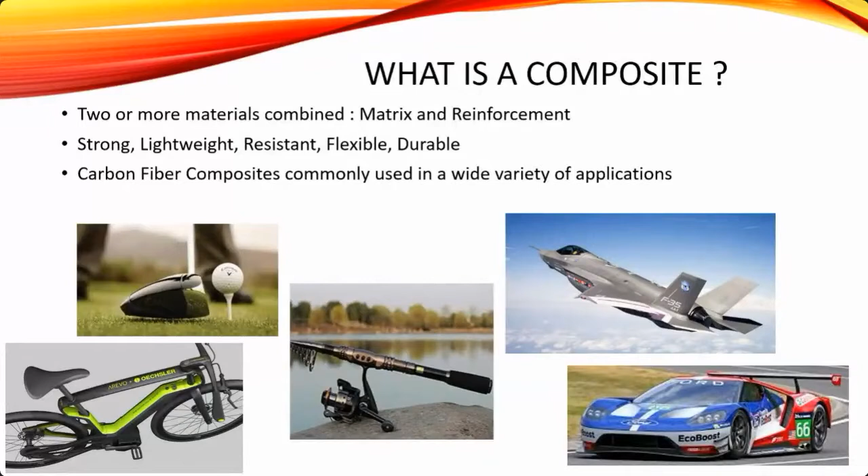Carbon fiber is popular because it's very strong and extremely lightweight. These properties make it a great choice for golf clubs, fishing rods, and bicycles. Carbon fiber helps to optimize the performance of race cars and even airplanes. We've seen some benefits of composite materials. Now let's see how we can utilize 3D printing to create strong, lightweight, and long-lasting parts.

Markforged specializes in the fused filament fabrication process, also known as FDM. A base filament of thermoplastic material is fed into a heated printer extruder head and is deposited onto a platform, one layer at a time. The build platform then lowers as each layer continues to grow the part. A unique option that Markforged offers is continuous fiber reinforcement. Maybe your part would benefit from additional strength or stiffness. A second filament can be extruded at strategic locations to increase the strength of a part.

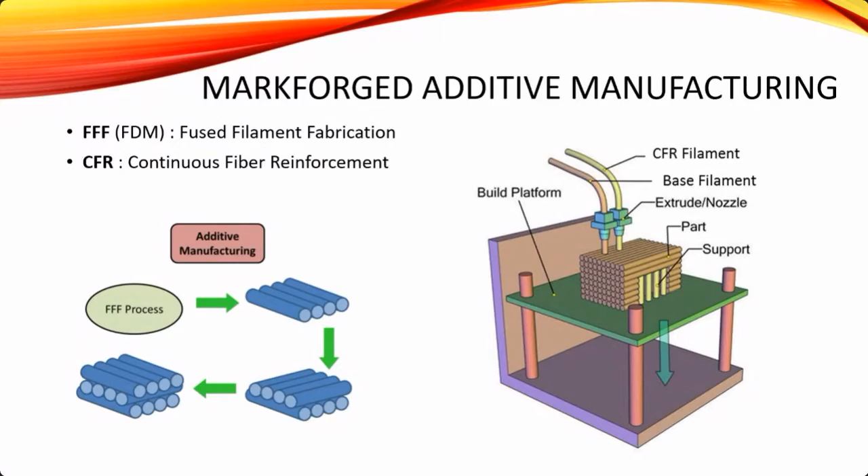To further illustrate this process, here's a photo of a 3D printer. The filaments are stored on reels and are loaded in the printer. An entire part can be printed using only the base filament, but you can also choose to strengthen your part using continuous fiber reinforcement. The next photo illustrates continuous reinforcing fibers along the outside of the part. This will maximize the bending strength. Next, we'll review which materials are available for base filaments and their individual benefits, and then we'll look at various options for continuous fiber reinforcement.

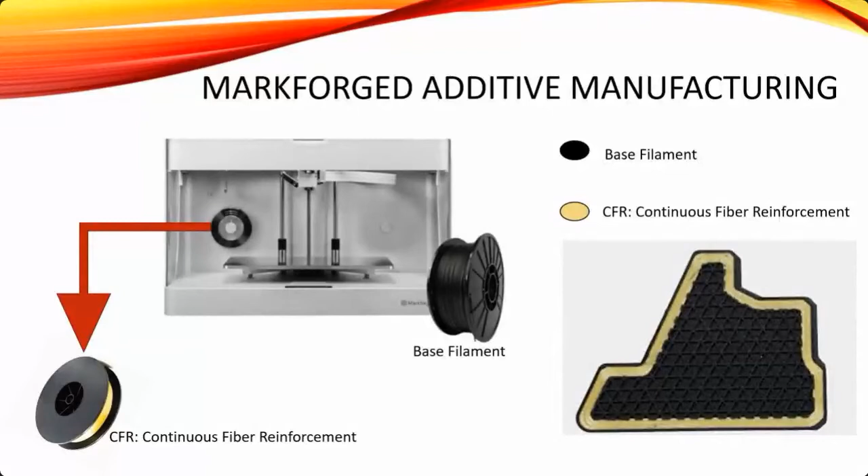Onyx is the flagship base material, and it's also a composite. To best describe the strength of this unique material, it's helpful to use an analogy of another very common composite we see every day. Concrete is made up of cement, sand, and aggregate. Each individual component will not hold its own shape with any amount of force, but when combined, they make a rigid, solid material. Onyx is created by combining a nylon thermoplastic with chopped carbon fibers.

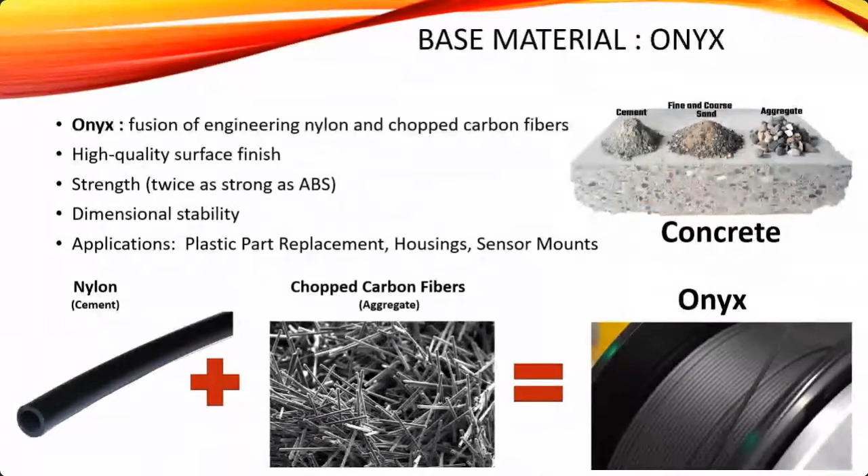We know that carbon fiber has very strong attributes. Another benefit of this creative blend is an impressive, high-quality surface finish. Parts are both beautiful and strong. Also, Onyx holds its shape. The edges are true, parts look better, and fit together better. Onyx is an excellent choice for so many applications. Functional, with a surface finish you can be proud of.

Another, I have to just click. All right, let me just, I don't know what happened there. I'll restart this slide.

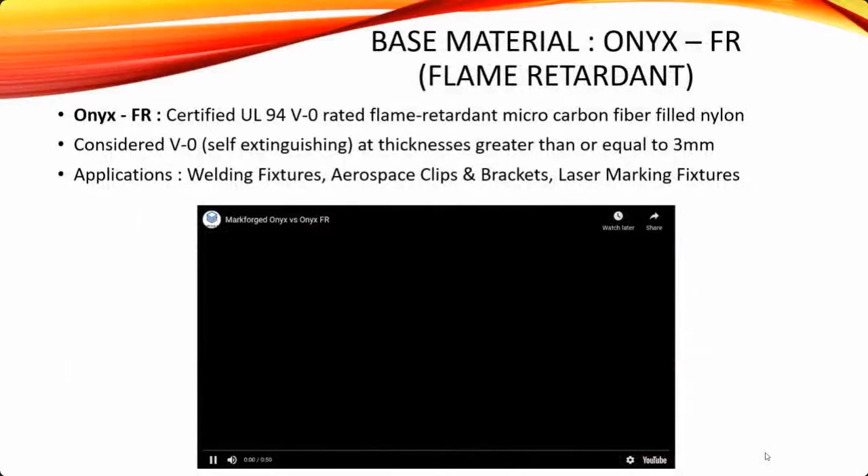There we go. So what if you require parts to be non-flammable? Markforged developed a very special variant of Onyx, which is flame retardant. You'll still have all the benefits of Onyx, strength, a beautiful surface finish, and it can survive in a flammable environment. Onyx FR is a great material choice for automotive, aerospace, and defense applications. The video does a great job of demonstrating how amazing this material is. Even under a constant flame, the fire does not spread. It's self-extinguishing.

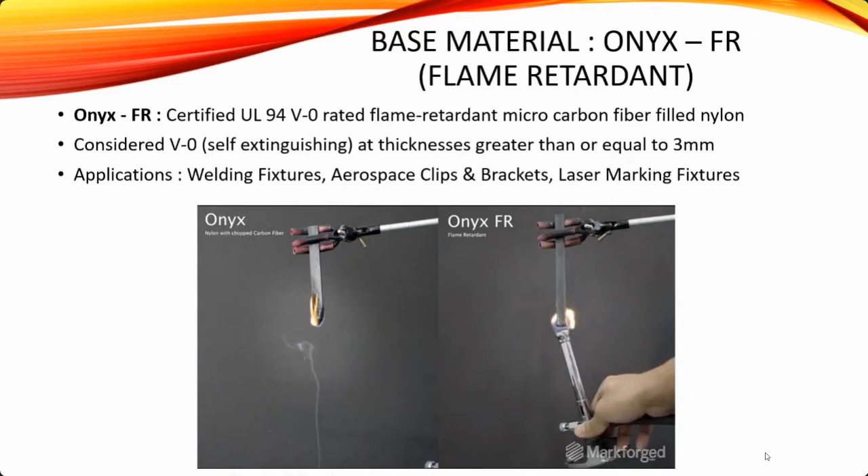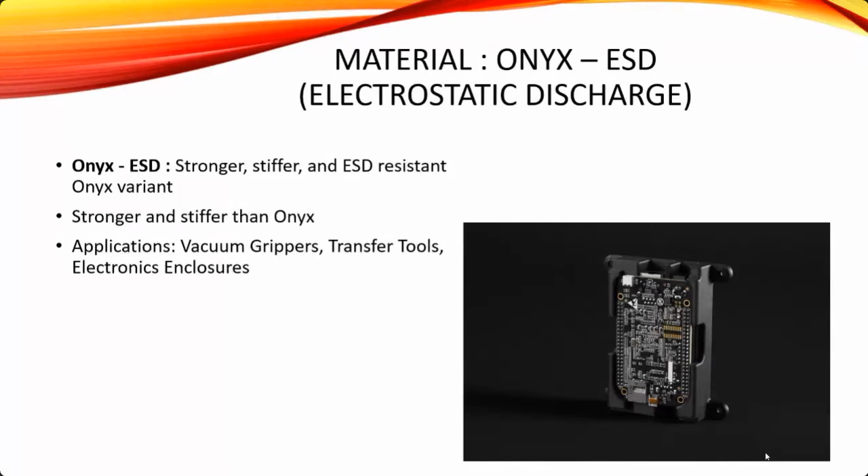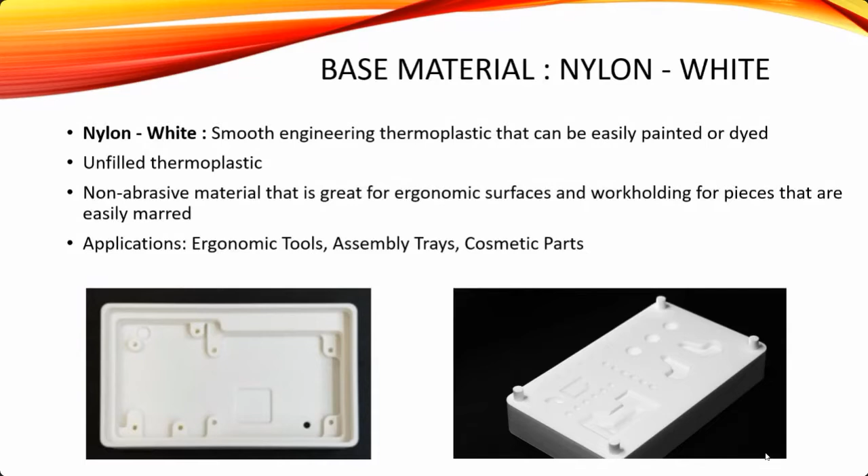We'll review the additional filament choices available for continuous fiber reinforcement. Being able to pair the optimal base filament with the optimal continuous fiber reinforcement allows us to utilize all the benefits of composite materials.

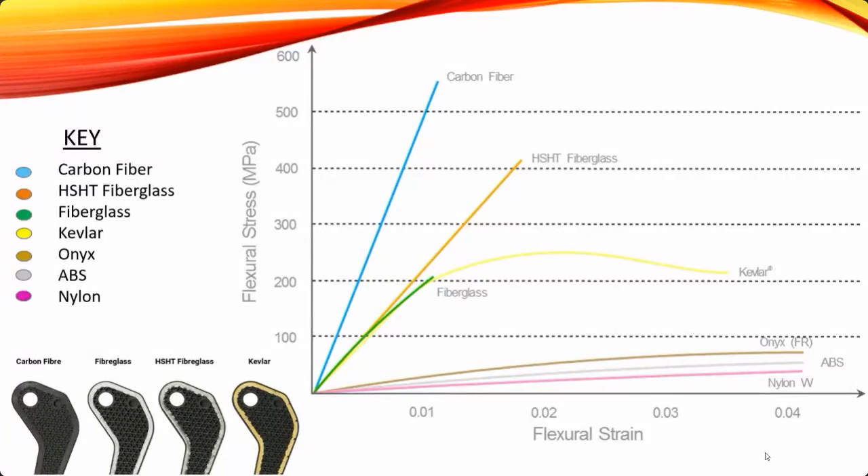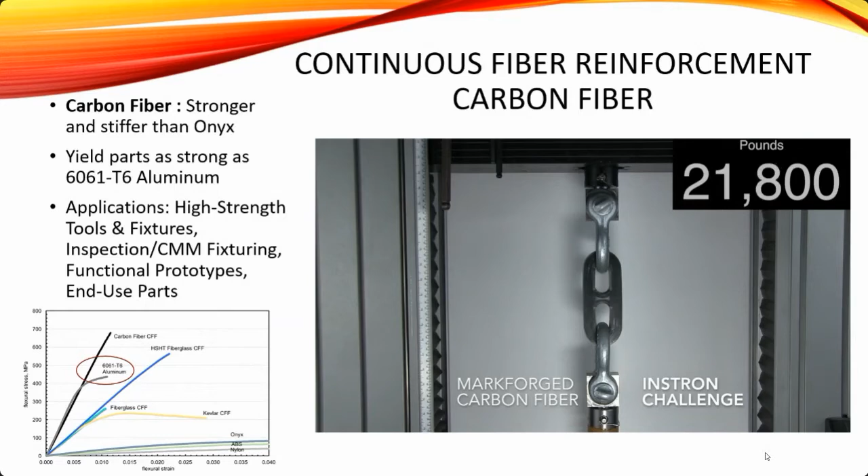This Instron challenge really showcases the strength of the continuous carbon fiber. We'll see the pounds here, right there in the upper right. Still holding it, 21,000. Still increasing. Wow, I just think that's a great example.

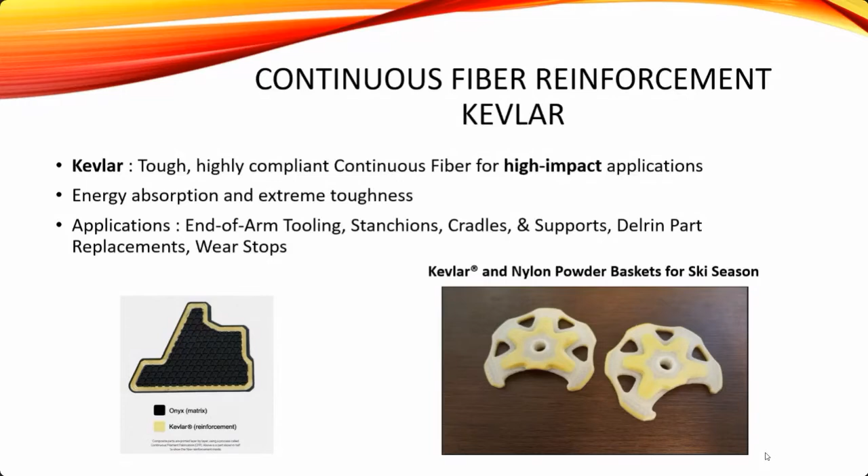Kevlar is a great option if you need a forgiving and durable material. Kevlar is commonly used in bulletproof vests. The goal is to absorb a force and not break at high impact. It's easy to recognize its yellow gold color. Using nylon as a base and Kevlar as reinforcement results in flexible yet very strong parts.

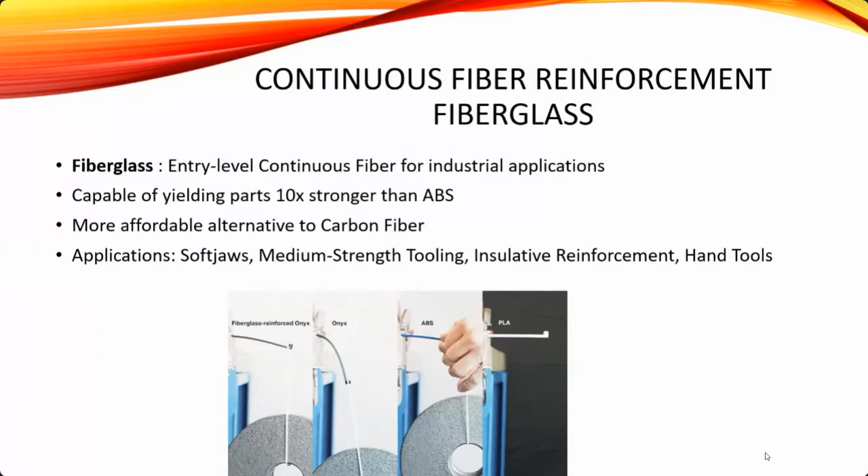Last, but certainly not least, is high strength, high temperature fiberglass. This reinforcement fiber comes in second in strength, just after carbon fiber. It's strong in both low and high temperatures, but it's ideal for use in high temperature environments like autoclaves and molds. A great combination would be using Onyx flame retardant with high strength, high temperature fiberglass for a welding fixture, for example.

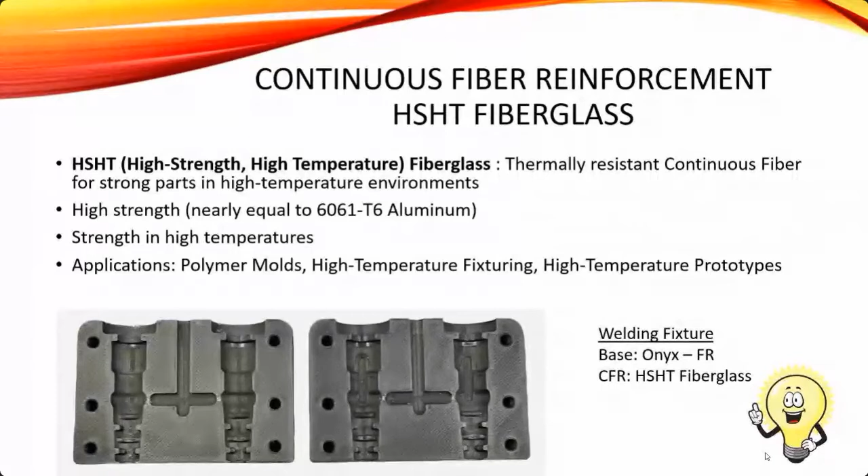All right, and as promised, here is today's lineup of the Markforged composite 3D printers. We have two series, the desktop series and the industrial series. How do you choose a model? Well, you want to start by identifying your needs. What size are your parts? Are there any strength requirements? Do you have any high temperature or ESD requirements? Do you want the ability to customize many different designs for new projects? I'll give you a brief overview.

So the flagship printers are on the left, that's the Mark Two and the X7. They're capable of printing all of the materials we have reviewed today, allowing you the flexibility in designing the ideal part for many applications. In the middle, we have the Onyx Pro and the X5. This is a more simplified option. You can print with Onyx as the base material and fiberglass as the continuous fiber reinforcement.

And then finally, we have the Onyx One and X3 available. They're base models that do not use continuous fiber reinforcement. You can print your parts completely in Onyx.

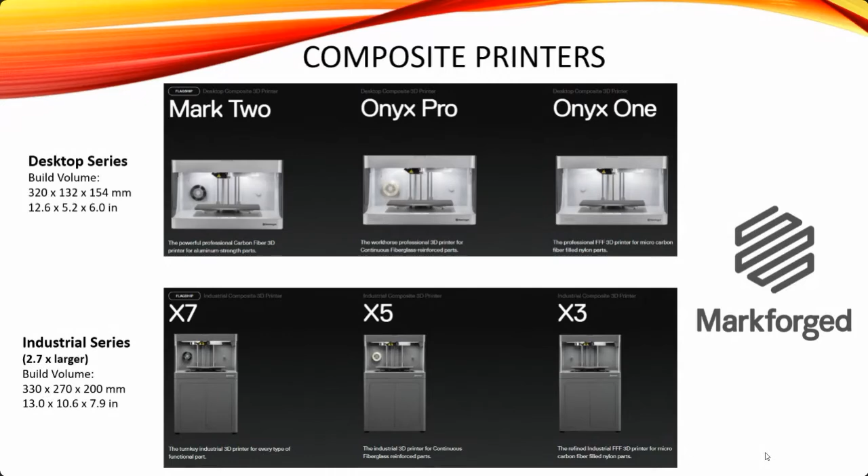All right, now for some 3D printing applications. In the early days of 3D printing, the primary application was basic prototypes. Today, since we have the ability to use more advanced materials, the applications have grown considerably. So I'll share a number of these with you now.

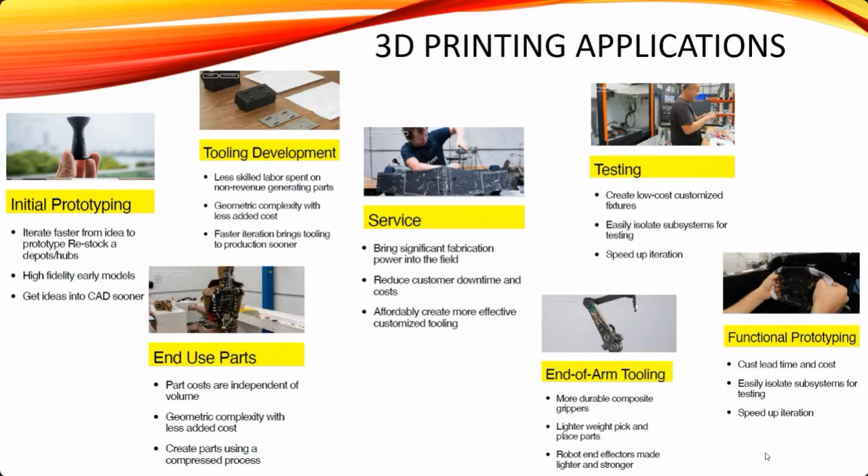End-use parts: the strength and durability allow for functional, complex parts at reduced costs. Tooling development: you're able to quickly print complex geometries that cannot or are not easily machined. Service or maintenance: easily create custom tooling or fixtures that reduce downtime, saving money. And functional prototypes and testing: you have the ability to evaluate actual part properties, make design changes, and then quickly print new iterations. It takes the guesswork out of engineering, not having to rely on only basic, simple prototypes.

Now we have a few success stories. This one is a company in Italy that used a lifting tool to move really heavy engine parts like pistons around their factory and also cargo ships. The previous lifting tool was machined out of steel, but they found this was too expensive, too time intensive, and really too heavy for people to transport.

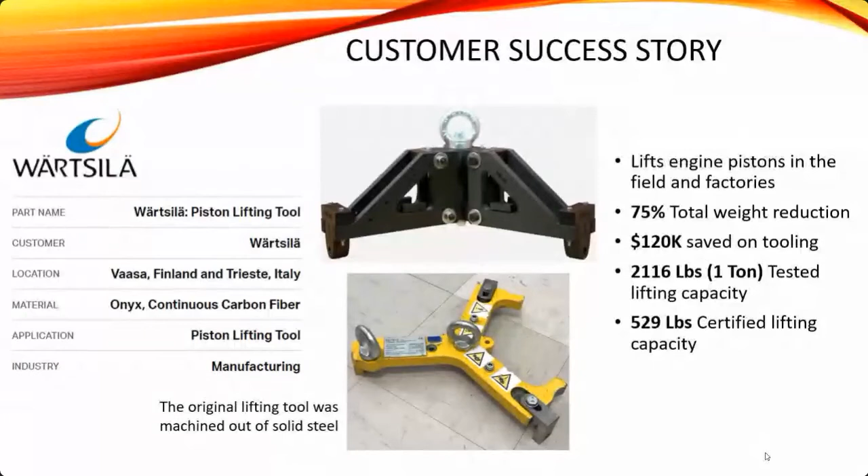They redesigned the part using Onyx with carbon fiber reinforcement, and they were thrilled with the results. The 3D printed part allowed them to reduce the weight by 75%. They saved over $120,000 in just 8 months. The tested lifting capacity was 1 ton without any deformation. There was a required safety factor of 4, so the certified lifting capacity was 529 pounds. Still very impressive.

Fischer Connectors needed to produce overmold tools for the military. The military operates in unforgiving environments, so they need robust connectors and connectivity solutions. They competed with other companies to make these molds, and turnaround time is key. 2 to 4 weeks and $5,000 per part made this very challenging.

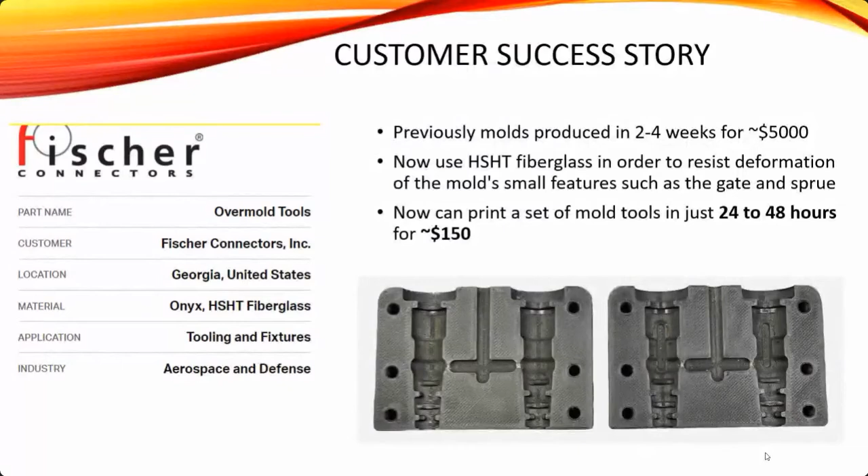3D printing changed everything. High strength, high temperature fiberglass was selected in order to resist deformation. The mold tool is clamped down at 30 tons and heated to almost 400 degrees Fahrenheit. They can now print these molds in 1 to 2 days for $150, allowing them to be much more competitive and more easily win bids.

Alcon manufactures contact lenses, and each lens must go through multiple inspections. Some of the inspection lines are automated, but whenever there's an upgrade to the line, they need custom bracketry to retrofit the new equipment into the existing line. Machining custom brackets was a difficult task. It could take 4 to 6 weeks to arrive, and that's if they found a job shop willing to take a one-off order at all.

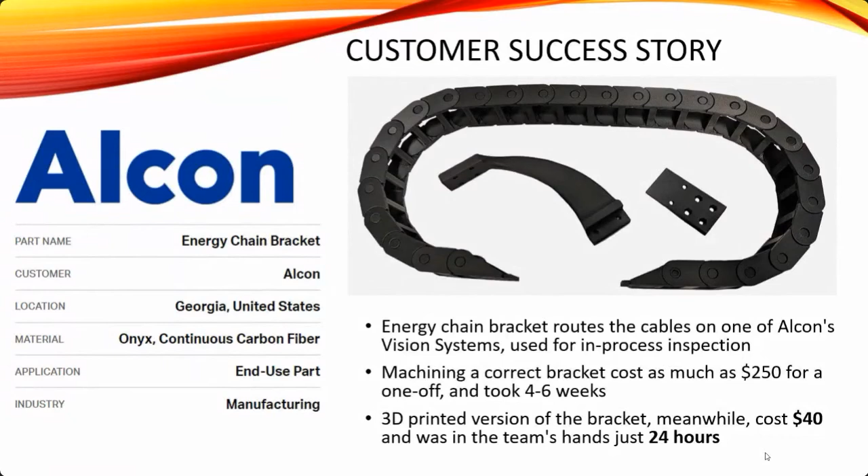Having a 3D printer on site enables them to save time and money. Downtime in production is always expensive. Having custom printed brackets for $40 in just 1 day is a huge benefit. But more amazing is the decreased downtime on the production line.